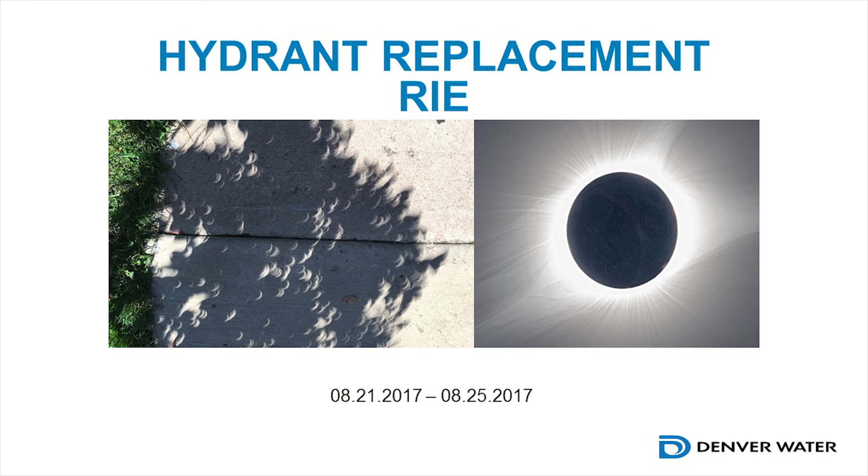Good morning, everyone. I'm glad you came out to our hydrant RIE project. The guys right here, our small maintenance crew, we're working on standard work. So we had 3 points we dealt with: one, standard work on hydrant replacement; 2, how to determine the type of hydrant replacement we're doing; and shoring, making sure that we have our proper shoring so the job can get done in a safe manner and everybody makes it home.

I want to thank the crew right here, John Lujan's crew, and his guys, plus we have a couple extra foremen in there, and Drake, the planner. Also, we want to thank the people that are on the board for helping us out, people in the warehouses, the fleet, and people upstairs, Jim Chesley and like that, for helping us out and giving us information. So without further ado, we'll go ahead and crank this up.

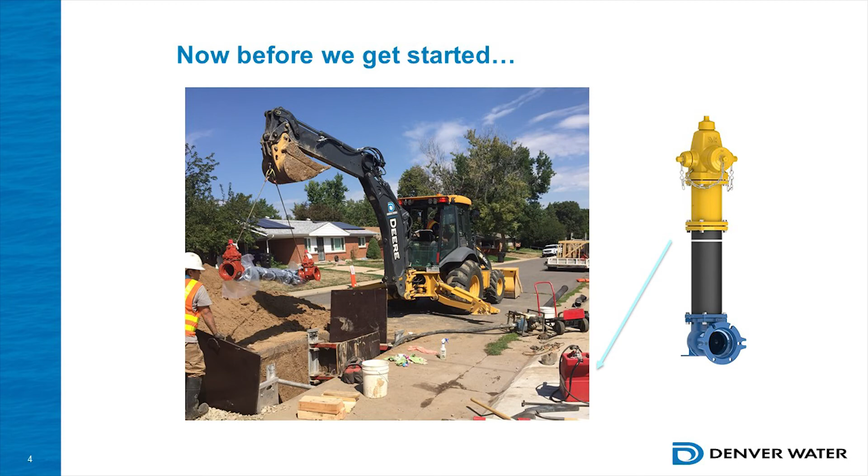Good morning. As Sam was saying, currently we replace hydrants when either the hydrant gets hit by the public and it's an old hydrant with no parts, or the hydrant maintenance crews go out on their regular maintenance and find the hydrants are either inoperable or do not drain. That hydrant replacement currently was a 2-day process. We would start with replacing the property line valve, the main, hydrant tee, and the hydrant valve. And the following day we would come in and replace the branch line and the hydrant itself.

John Lujan, Water Distribution Supervisor. Paul Smith, Utility. Audrey Wadley, Water Distribution Supervisor. Jake Morton, Foreman. Roger Murphy, Senior Operator. Tom Graybill, Water Distribution. Gino Della Croce, Operator. DJ Lopez, Utility. Jeremy Jordan, GIS Technician. Lynn Zimmerman, Ergonomist. Darren Truax, T&D. And Drake Denner, T&D Planner.

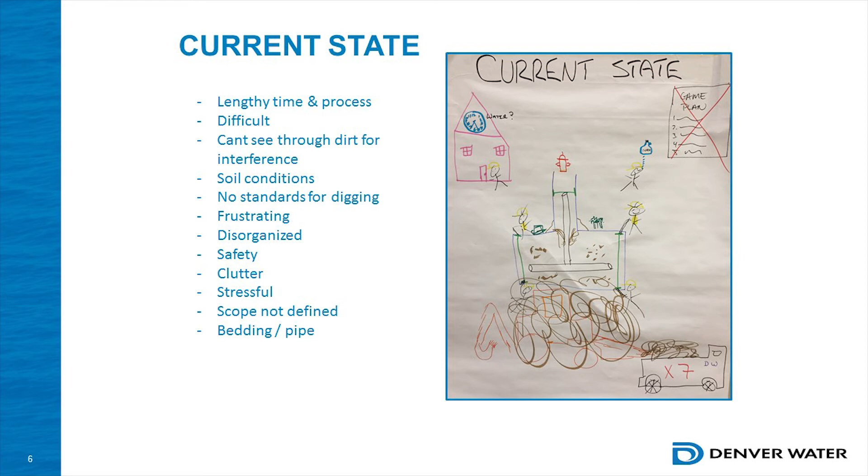So our reason for action: right now, there's no standard work. There are a lot of inconsistencies in the hydrant replacement process of when to do a full replacement and when not to. So our current state started out really without a game plan. Our water outage for the customers lasted quite a long time. There was dirt everywhere. We were just a little bit unorganized. So that was our current state, but we're better now.

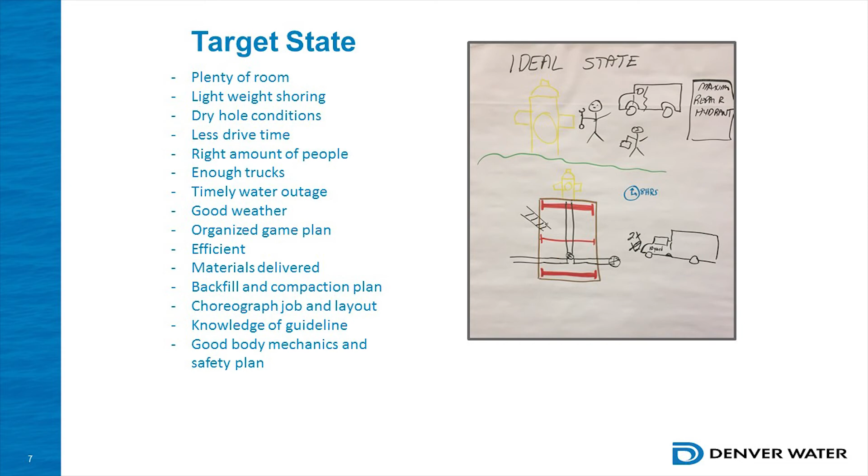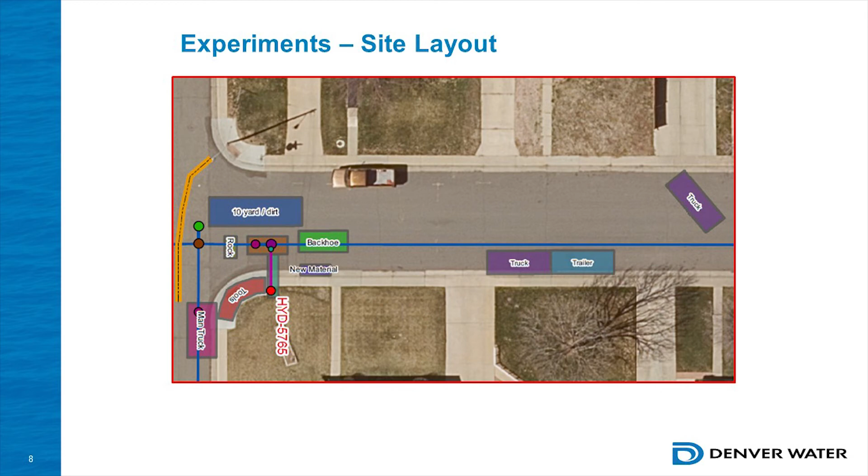So this is our ideal site plan we came up with. We ran a 6S to try and improve efficiency and safety on the site, and this shows an overview of what we have going on. We've got the hydrant to be replaced here. We're trying to use the trucks to help provide safety for the work crew and stem the flow of traffic on both sides. Tools are out of the way, and as the previous slide showed with all the dirt, hopefully this will keep everything in one place so we're not moving it all over.

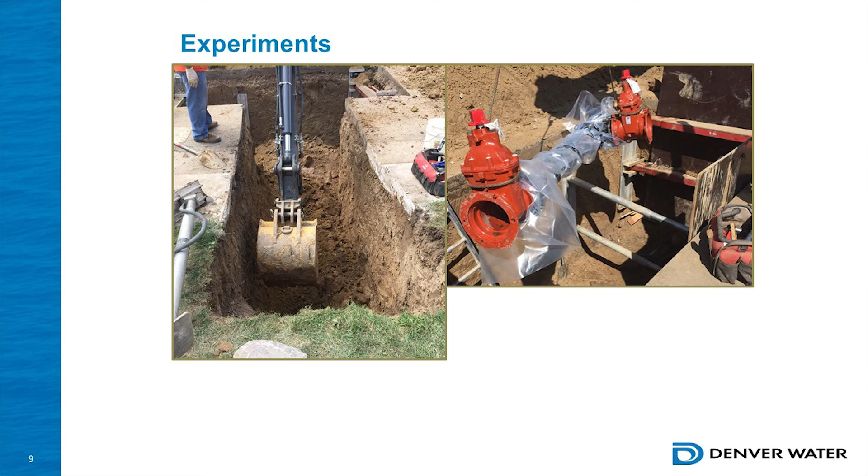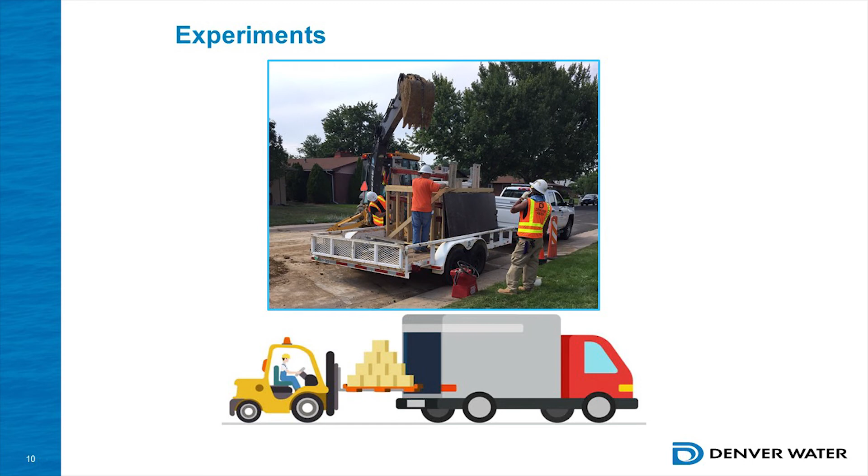So that way we're not causing problems and causing injury to people, because it's kind of difficult climbing in and out of the 10-yard to get the material needed. So during this process, we came up with a playbook. So we got 3 plays basically. Lots of thought went into that, and it was all metric driven pretty much.

So when you look at the current state, the main driver was that we wanted to keep the integrity of the system. So by replacing the PL valve, the hydrant branch T, and all the way to the hydrant, we're replacing a lot of lead joints, which is better for the system. But it takes 2 days. So when we went through our processes, that was kind of an unbalanced scorecard.

So then we started looking at other avenues, and one was customer outage. One was the crews working overtime because they're over there doing that. 2 weeks out of a month, they're on the daily leak, so they get overtime on that. Then 1 week out of that month, they're doing standby.

So during the week that they're supposed to be not getting any overtime, that's when we'd be doing these. So it'd be 4 weeks there that they do that. That seemed a little bit overburdened on the folks. There were other drivers on that as well. So what we came up with was 3 plays. So the shoring was the main factor.

As you all know, once you open up a hole, it's constantly trying to cave back in on you, just due to the forces. So if you keep it to one side only, it's a lot easier to shore. If you go to the T arrangement where you're doing the main up top and then you got the hydrant here and you got the inside corners, now you got 2 sides that are wanting to cave in. And that was extremely hard to get the dirt to stay just so we could put shoring in.

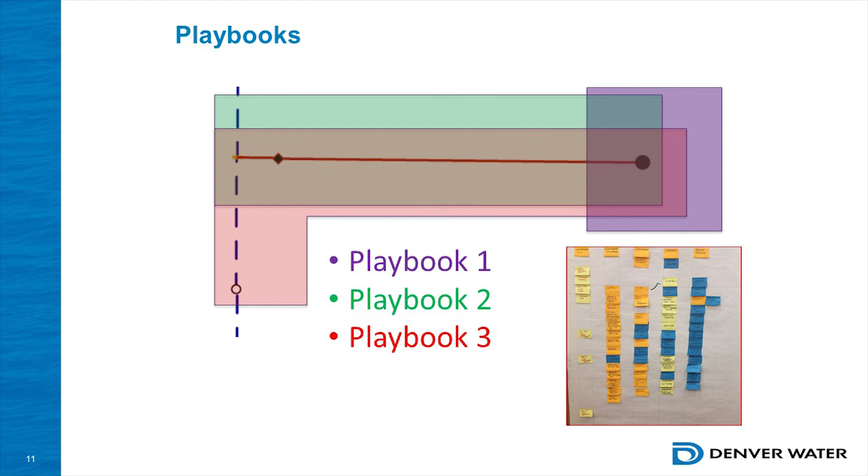Okay. We came up with an aggregate plan for a hydrant install. And what we came up with is, first of all, hydrant only. We bring the truck out. That's 2 yards of crushed 3/4 inch granite, about 15 to 20 pieces of hydrant rock, and we have them dumped out right at the dot. Then we load out the hydrant and the muck, send him to the yard, and he comes back with 2 yards of blacktop.

So then we came up with the hydrant T, and then the hydrant T with the PL, and they had the same with 3 loads. We send him out, and he brings the 2 yards of crushed granite, the 15 to 20 pieces of hydrant rock, have him dump that. We load him out with 10 yards of muck with the hydrant. Send him to the yard, he brings back 10 yards of base. You dump that, send him out again, he brings back 4 yards of blacktop.

And that's down to 2 trucks. We bring it down to 3 trucks, and then that comes down to just 3 loads. And at the end, we'll have our hydrant, the topsoil, and we're working with the plan with the yard, and they're going to send out 6 40-pound bags, and then we'll do our topsoil. And that's what we came up with.

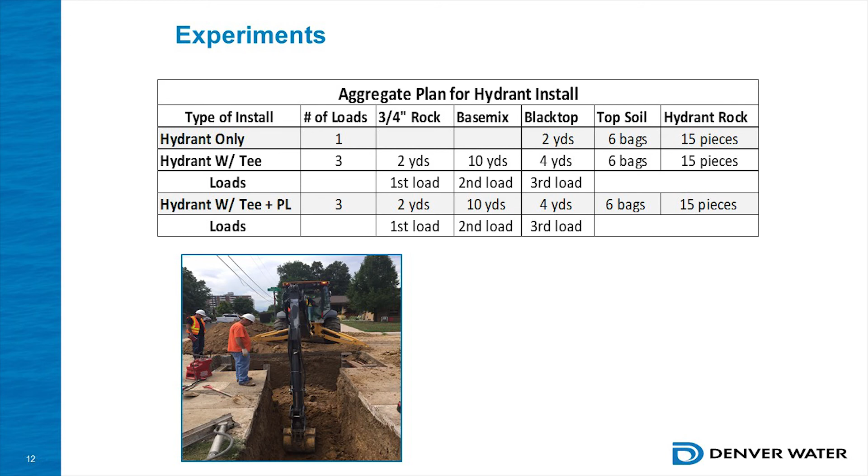So there were a couple of ergonomic issues that we looked at. One was there's lots of heavy objects that need to be moved from the man truck to the site, and they're awkward and heavy to carry. So we looked at different ways to bring them there. We tried a cart. We just had this one on hand, and it wasn't the ideal cart. It flips to be a cart you can push like so, but we're going to look into a smaller cart, perhaps with locking wheels, to get heavy objects to the site.

The other thing was lowering heavy objects down. The demo saw is heavy and you have to lower it down or reach up to get it. We looked at a rope and a clamp, and that wasn't ideal as well, but we're going to look at other ways that we could lower that down safely without causing any harm.

And then the other thing was we found hearing protection. The noise in the hole when you're using the demo saw or even out on the street exceeds 109 decibels, which is more than the earplugs will protect you for. So we found these that will be adequate for ear protection, and I recommend that they use them in the hole, the person who is using the saw as well as the other person who's down there, or if you're on the street and you're standing next to someone who's using the impact or the demo saw, to protect your ears as well if you're close to that person.

Then we also looked at compressing the shoring rather than doing it with your body, to use either the equipment, or we're looking into valves that would make that more easily compressed, as well as not compressing the shoring completely so that there's not as much effort used. And I think they found a way to fit that onto the trailers.